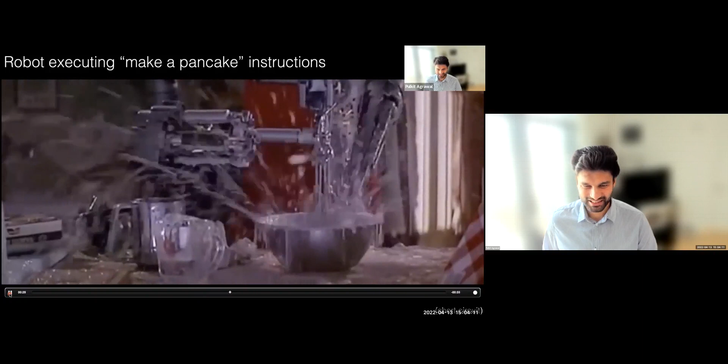Marvelous. That's what he thinks.

For crisp yet moist potatoes, brown on one side, then turn over. This will be some good slop.

Is something burning? So it never realizes, right, that it needs to take the toast out of the packet and then put it in. And when you say rotate it, it means rotate just the toast, not the pan with the toast. Right. So the point being that even if we could get to these concrete instructions, there's a lot of common sense knowledge which goes into actually executing them, right?

So one model that we typically have is: there is language, it goes to a high-level plan, and then the low-level skills which execute them. And typically what we might think is that language is the hardest part to communicate in language.

And coming up with a high-level plan is maybe hard and the low-level skills should be easy, right? But let's pause for a moment and actually look at evolution. Starting from life, it took us around 3.5 billion years to evolve apes, which maybe you can say can do some low-level skills. They can jump around, walk, use some tools.

And then from apes to humans, it took around 18 million years, orders of magnitude less time. Then for language to evolve, it maybe took 50 to 500,000 years, again orders of magnitude less time. So in some ways, evolution took a lot of time in evolving low-level skills and exponentially less time to do high-level planning and language.

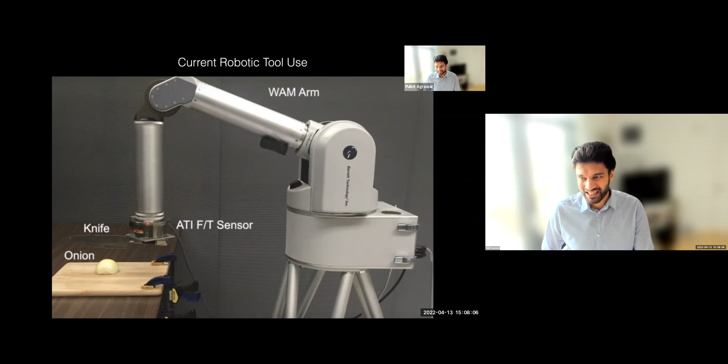So if we have to use a knife, what would we need to do? First, we need to grasp it. Then we might need to reorient it so it's in the right position to actually execute the cut. And then we can actually go and cut. Now, in grasping there's a lot of progress, and if there's a single object on a table, we can get accuracies north of 90%, even 95%.

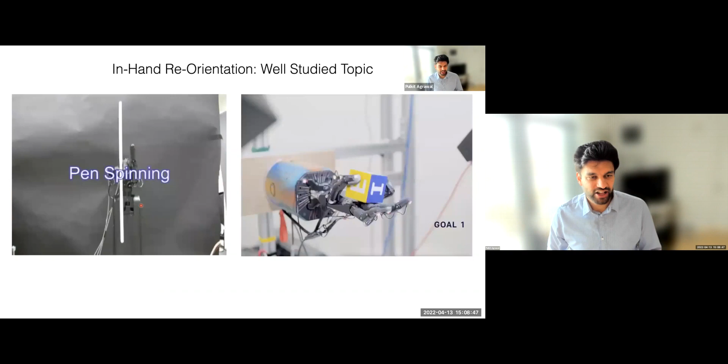But then there's this next step. If I just grasp this knife, I cannot really use it. I need to turn it around in my hand before it becomes useful, which leads us to the problem of reorientation, which is much harder. Reorienting objects has been a popular topic of research. This is a video from some labs in Japan, more than 20 years ago, manipulating this long pipe in a very dexterous and meaningful way.

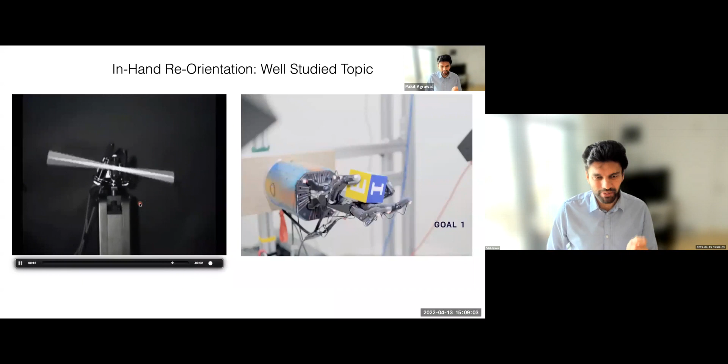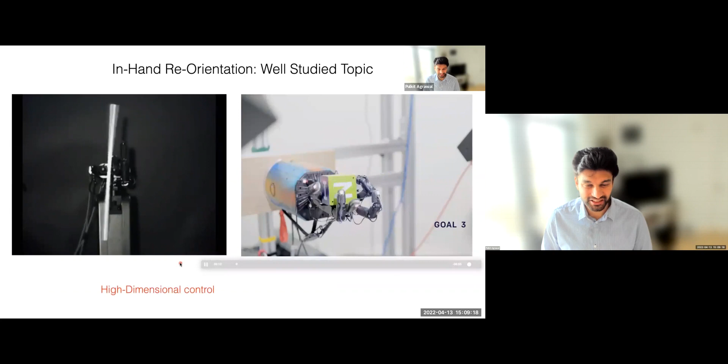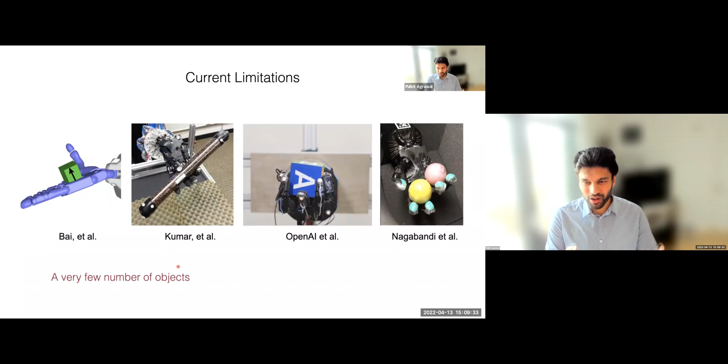More recently, there was a demonstration from OpenAI where they were reorienting this cube in the hand. But if you look at these systems more carefully, they're stymied by many limitations. The reason this problem is hard is because it is high dimensional and there are discontinuities which come from contact. But most of these systems either work with very few objects, pretty much only the objects you see on the screen, and they operate with an upward-facing hand.

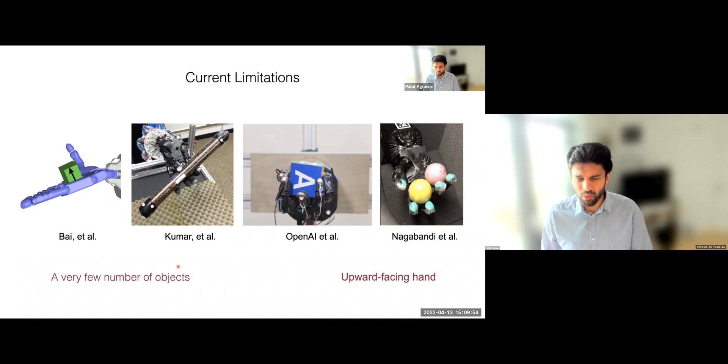And many times, to get the state of the object, there is very big sensing equipment that is put in. What I mean by that will become clear. But let's first try to solve these two issues, and let me lay them down concretely. What we want is a system which can work with many different objects, and we want it to work with the hand facing upwards or facing downwards.

I mean, many times when we go, our hand is facing downward, we go pick up an object, right? You might say, well, what's the big deal with the hand facing downward? The fact is that when the hand is facing upward, there is gravity which supports the object. But when the hand is facing downwards, the gravity is actually against us and the exploration becomes really hard, because there is no supporting force to be had. So the hand facing downwards is actually a problem where the object is almost always in an unstable configuration.

And the third constraint we want to make is that the system should actually work with real world observations. Now, what do I mean by real world observations? They are things that we can actually measure with sensors that we can put on a practical system. For example, I can tell what the target orientation is, what the joint positions of the fingers are, which we can read off motor encoders, and maybe we only have access to vision, say RGBD or a point cloud, or maybe access to an object pose system. So these things we can maybe measure in the real world with minimal instrumentation.

And what I'm going to show is how do we satisfy all these three criteria and build a system which can reorient many objects, first in simulation, and then we will move to some real world experiments. So the first question we're going to ask is, how do we reorient many objects with real world observations? This was work led by Tao and Jie, who are two PhD students.

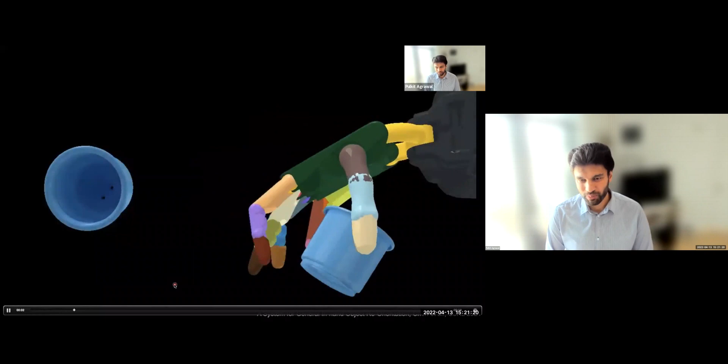So what we did was, we initiated this curriculum over the gravity, where we start with zero gravity and go to normal gravity. But this is something we can do because we're in simulator, so we can really exploit the simulator. If we do this, we get a big jump in performance. It goes from 45 to around 70% that we were seeing with the hand facing upwards. So by exploiting the simulator, we were able to build a policy which can reorient pretty much any object you give it. Not 100%, but still at 70% if you want to be within 5 degrees.

So this is just one video of the hand continuously reorienting these objects. And there are more videos of the hand reorienting different objects. And surprisingly, the observation that we had made initially, that we require no object shape, actually holds true even now. So what I'm going to do now is take a small pause and see if there are any questions.

I have a few questions, if that's all right. Yes. So I have 2 questions. The first one, do you assume any friction with the objects while using the hand? Yes, there is friction. But you still assume that you have to hold it, it wouldn't slip away from you just by not doing anything if you hold it upside down? Well, if the fingers don't apply the right force, it will slip down.

Okay. And my second question is: do you consider the maximal strength that you can put on a single object, let's say a paper cup or something? Do you consider like this is the maximum strength I can put on it, not any more than that? Not for now. One reason is we don't have tactile sensors on the hand, but that is something I'm going to touch upon later. But it's an excellent question. Thank you.

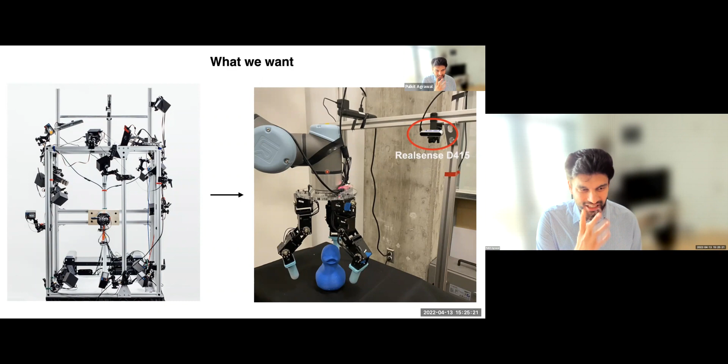The reason is this 5-finger Shadow Hand is first really expensive, but second, it keeps breaking every couple of weeks. So it's not really an experimental platform we can use for now. And this platform is much more robust. It just lasts, it doesn't break, right? So now let's see what happens in this scenario.

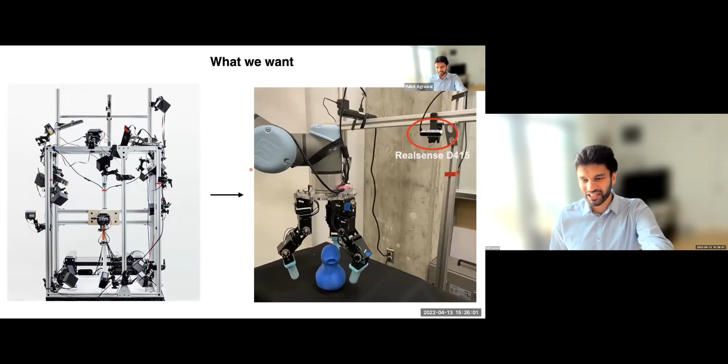So until now, what I've told you is that we have trained this policy with state, and it goes to actions. But then I also put something under the rug, which is this object current pose. How do we actually get the pose of new objects when there's severe occlusion? Because now we only have one camera looking at the object, so the point cloud is going to be pretty occluded. So how do we actually get the object current pose? This must be inferred from the point cloud data.

So now what we do is, instead of training a student policy from these states, we're going to train it directly from point clouds and also have joint positions as input. Now this needs to work in the real world, so it needs to be fast. So we have a bunch of things to make things fast, which I'm not going to talk about. And then you also need some recurrence so that you can accumulate information over time. And we were able to get speeds up to 12 hertz on the system.

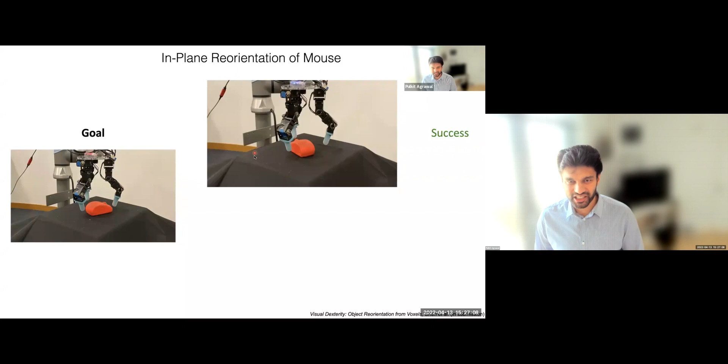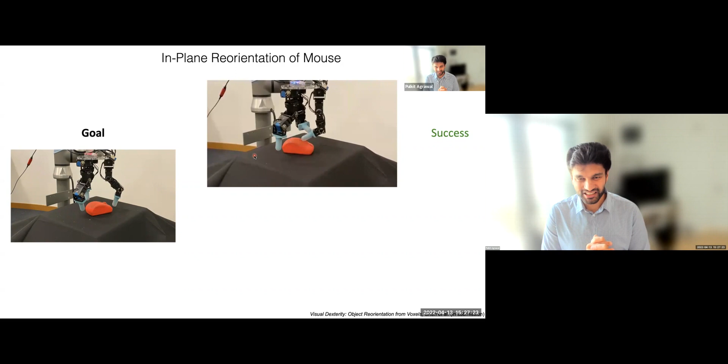And what you find is that the motions the hand is making are not elegant, but it generally makes progress in the correct direction, and when it gets close enough, it stops. Over here is another video, but this is a failure mode. But what you notice is the failure mode is not because the hand cannot reorient it. Many times it is because it does not know when to stop.

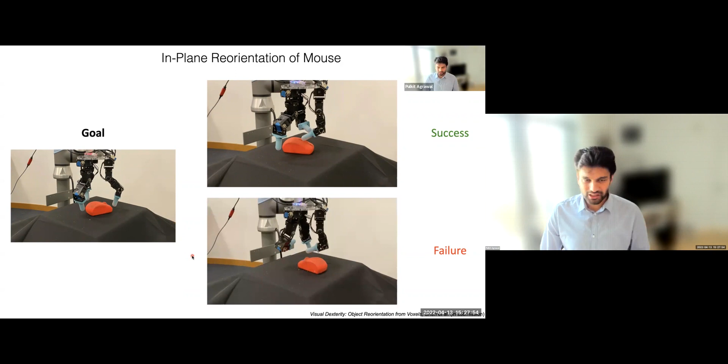And this is something that we're investigating, why it is happening. But one reason is that because of so much occlusion, it just doesn't know if it has reached the goal configuration or not. Then the system is robust to disturbances. For example, over here, Tao is putting objects at different points, and the fingers manage to pull them in and still reorient the object. So you don't need to initialize the object in any special way.

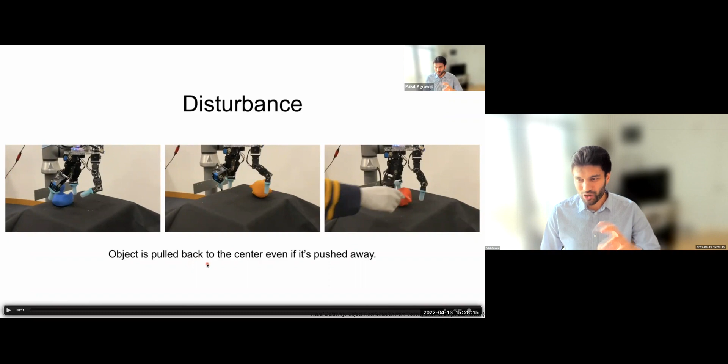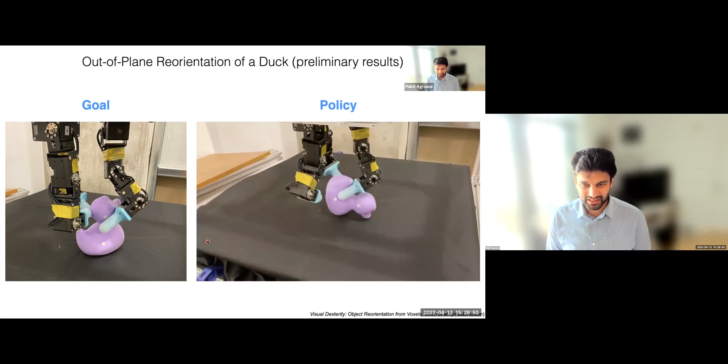Okay, so now, is this system great? I think there's a lot of room. I wouldn't say it's great. I think this is just the first sign that we can train policies in simulation and then transfer them to the real world.

And is this a video that I chose? No, this is what we commonly observe. The problem that we observe is that we don't know when to stop, or the fact that the hand is very clunky in the way it is reorienting the object.

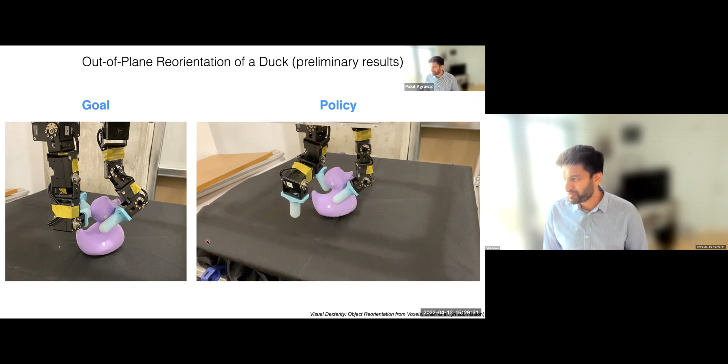So I will touch upon this, right? I mean, why is this happening? But maybe let's zoom out a little bit. So what I've shown is that first you design the controller, and then you're able to incorporate perception in the same paradigm, right? And then you might ask, why is this reorientation, which is transferring to the real world,

also very clunky? So one hypothesis is that our controllers are not as good as they need to be, but the second also comes from hardware design, where the hardware we are using is pretty arbitrary in some ways, right? First, it only has 3 fingers, which means the redundancy is much lesser. Then it has no palm.

Just imagine, pick up an object on your desk and try moving it. You will notice how many times you use the palm. This hand is rigid. It has no compliance in it. So imagine if something was made of steel and you interact with an object, you make a point contact, things just fly off. So you really want some compliance so you can conform to the shape.

There is no touch sensing, so you never know how much force is being applied. And even if you look at the finger shape, these are cylindrical, which is not ideal if you want to apply forces in a meaningful way. So there are problems at the hardware level which need to be resolved. Because of this, we have a different thread in the lab which is trying to really design hands.

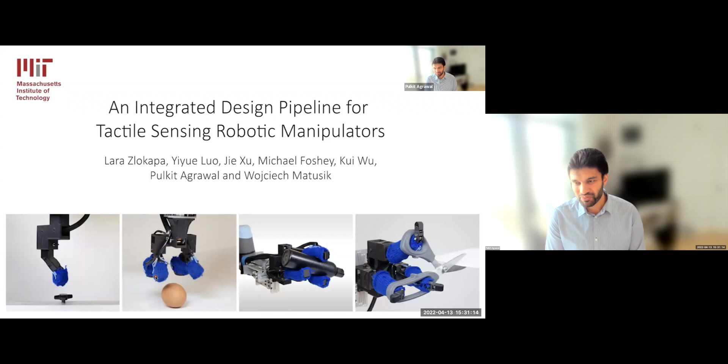So what I'm showing is a pipeline that we have developed for designing robotic hands. I'm showing you 4 different hands that we designed. These hands are 3D printed. And the blue things that you're seeing are almost like gloves that you can wear, and these are touch sensors. So how does this work?

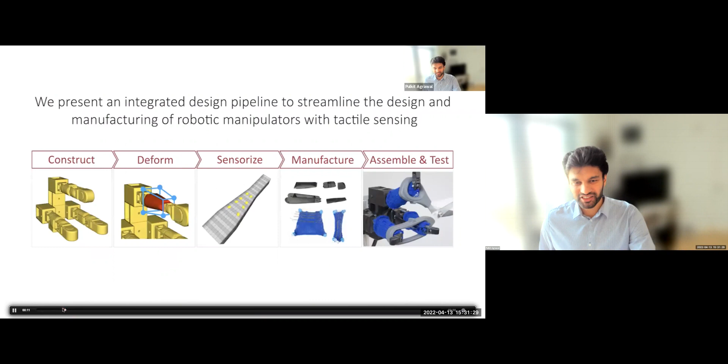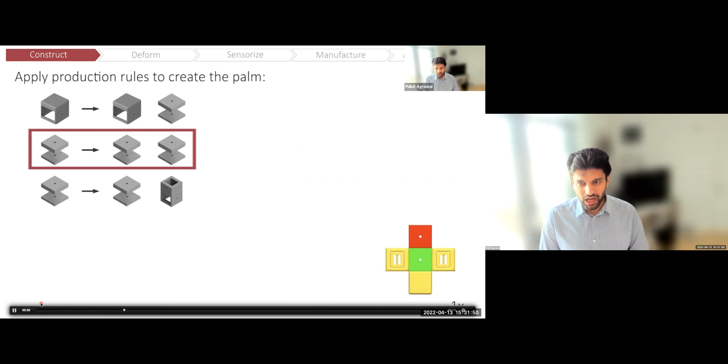Our pipeline looks like this: we construct the hand, then we deform the shape. Here's the video. Then we put some sensors, and then we manufacture it. So we have a grammar of some parts which can be composed to design different hands. This is the production of the grammar rules happening. Now I'm composing different grammar rules, and as we put them, we end up getting a hand design.

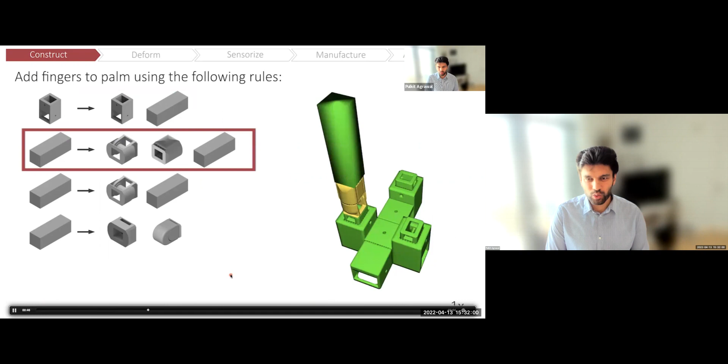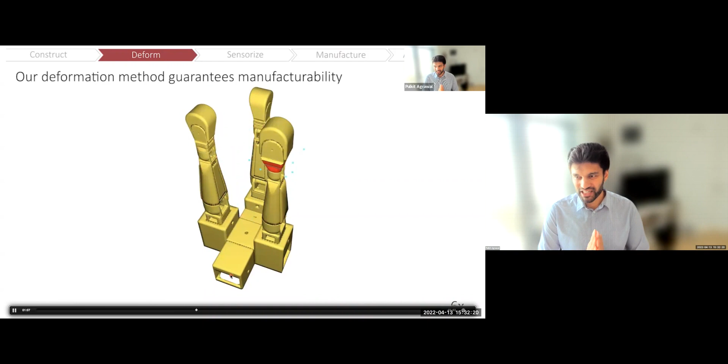What this does is it enables the designer to very quickly explore many different configurations, which is a very tedious process right now. If you have to sit in the CAD program and build everything, that's very tedious. But the shape of the hand may not be perfect, so you can go and deform the shape. And we guarantee that anything you do is manufacturable. Any design you come up with can be 3D printed and assembled together. So then we get a design.

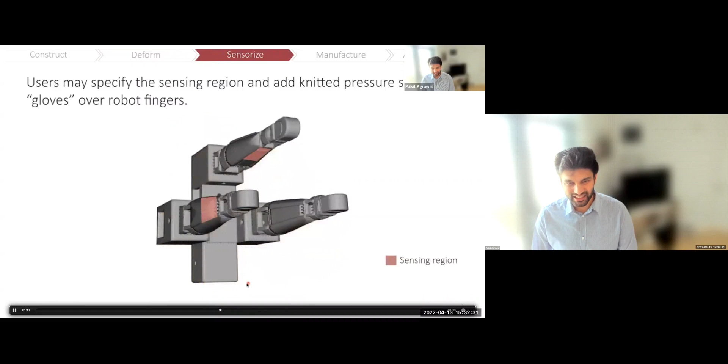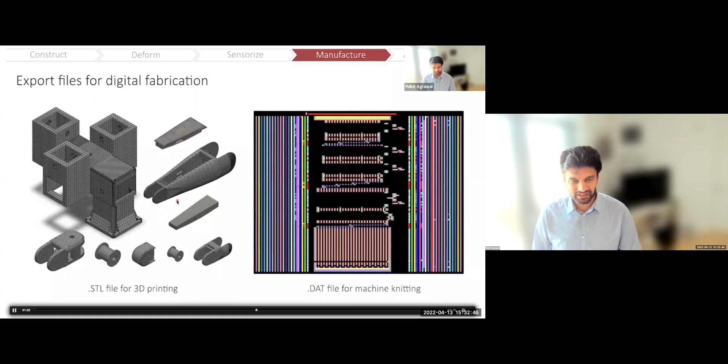Then we specify that we want touch sensors in some particular regions. We choose how the stitch of the touch sensors needs to be, and then we say where these sensors need to be located. Then the machine knitting and the 3D printing goes to printers, and these things are printed. This is a collaboration with some computational fabrication people at MIT.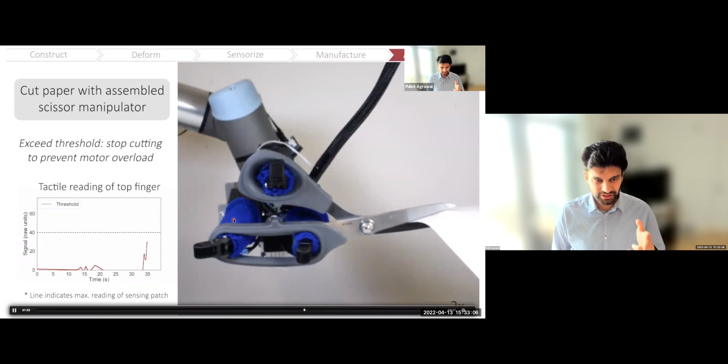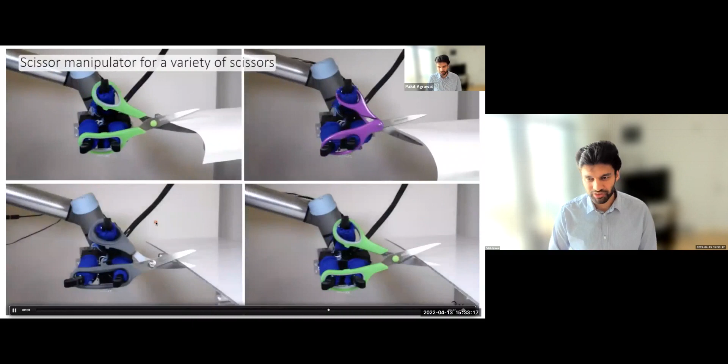Now we got this hand, and this hand tries to cut something. If the forces are small enough, it will cut it, as you see from the forces on the left. But if it is trying to cut acrylic, for example, the forces would be really big and the hand would stop. If you see in the bottom, the hand actually stops and doesn't go and cut the acrylic.

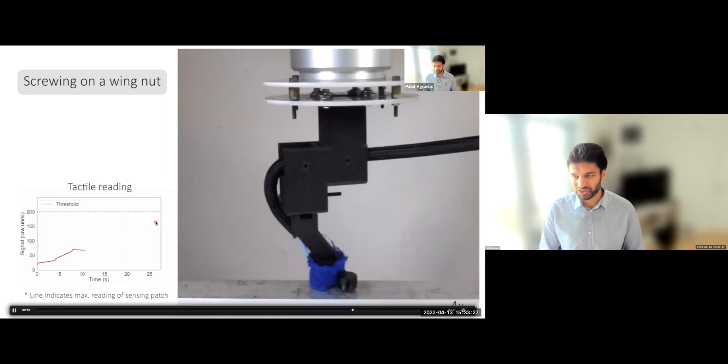So the hope is, now that we can design hands and this pipeline is completely computational, we can co-design both the hand and the control. We have been working towards it to some extent. For example, here I'm showing you some designs of hands made for the task you're doing. Over here, we needed a small thing to rotate the cube. Over here, you need a different configuration, or maybe a different configuration over here.

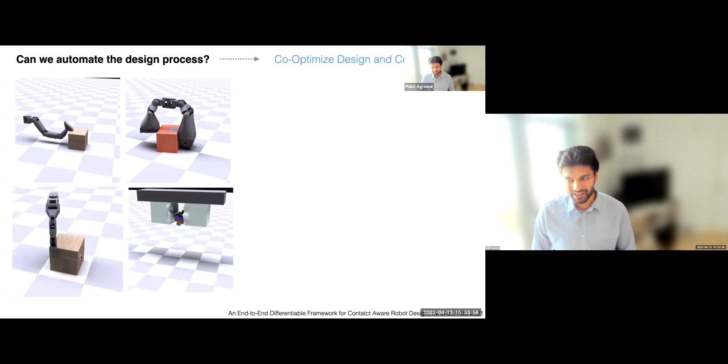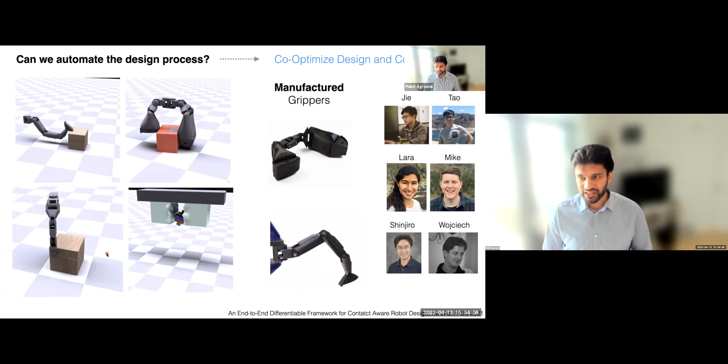And these things you can go out and manufacture. This is work done in collaboration with a couple of people at MIT. So in some ways, we can use the same framework to also do hardware and sensor design.

And I think what this problem really requires is a full stack approach where I can work on the control, the perception, and the hardware, because they all play into each other. Right? So to zoom out a little bit, we started with the fact that we want to learn low-level skills. And what I've given you is one specific skill, which is in-hand reorientation, and showed you how we can exploit the simulator in meaningful ways to make progress on this problem.

Right, so now, again, I'll take a small pause, see if there are any questions before I move ahead. Yes. I have a question. That's okay. Yes.

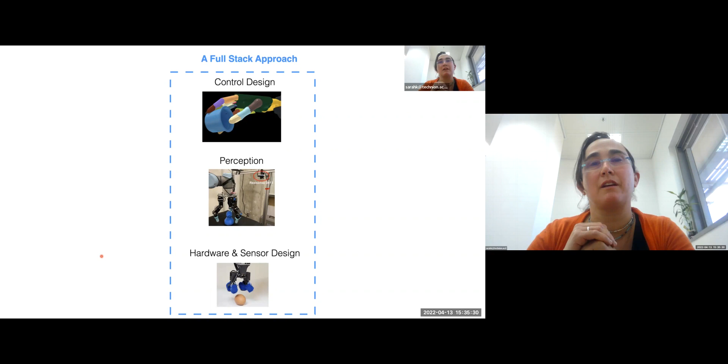So you said that in your previous slide, you had three components, one for the hardware design and one for the control design. And then you had the perception. And what I'm wondering is whether the perception and the control had direct interaction. I'm guessing the analysis of the image was focused on the manipulation task that you were aiming at here, or was it just classical image classification?

No, so the perception is trained with the same paradigm, right? So let me see if I can. I'm asking just to understand whether perception was task oriented, in the sense that it was trained to focus on things that actually affected the ability to grasp objects, or just detect objects in the environment.

No, so for example, this is the perception system, right? This is a point cloud, and the point cloud is trained to predict the actions. So the perception is trained for control. So when I say the same pipeline, I mean I'm using the same framework. Oh, I see. There is student-teacher training happening, right?

We can design controllers, we can incorporate perception, we can also do co-optimization, but we're going to use the same underlying algorithms to do all of them, instead of developing separate algorithms for control, perception, and hardware. So the perception was not a separate component. It was just part of the input, integrated. I see. Yes.

I have another question. May I? Yes. Okay, it's kind of a comment maybe about the control design. There is some evidence that when people are grasping or making manipulations, there is a sequence of actions, but in each part of the sequence, the movements of the fingers are coordinated. So all the joints are moving together in each part of the sequence.

So then they're changing from one to another, but in each part of the manipulation, the fingers and the joints are coordinated. So I'm triggered to think about whether this knowledge can be integrated somehow in the control policy, so it will be easier to learn than learning from scratch.

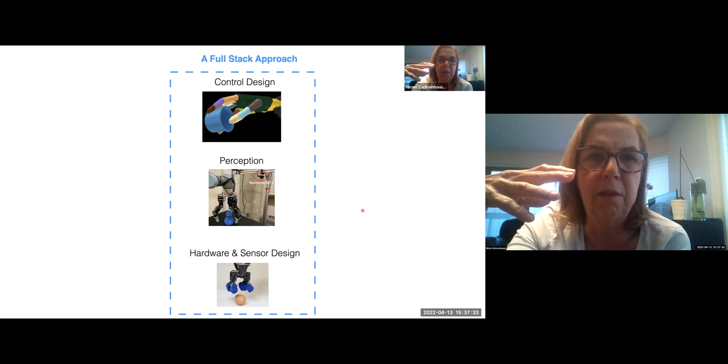Excellent question. I think there are ways to incorporate this prior knowledge. For example, you could have some demonstrations if you could collect them, and you could constrain your policy to be close to those demonstrations. But actually, I'm going to touch upon this in the context of a slightly different system, which is locomotion, where it's the same idea. So I'm going to touch upon what are the pros and the limitations of assuming it. So maybe I'll come to this question.

Okay. So I showed you one thing which was in-hand reorientation, but let me describe how we can use a similar framework to resolve some locomotion problems. And I will try to address the question which was just asked. So now we're going to take the same framework, but do locomotion. Current legged robots are great, right? We have all seen videos from Boston Dynamics, they're moving around.

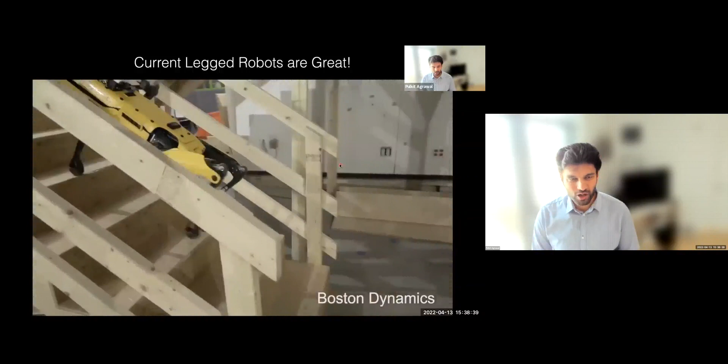So this agile locomotion has been a topic of great interest. Boston Dynamics made a robot which could be faster than Usain Bolt, but this is on a treadmill, externally powered, and the robot is held by a lever. Great demonstrations, but it cannot do it in the real world, right?

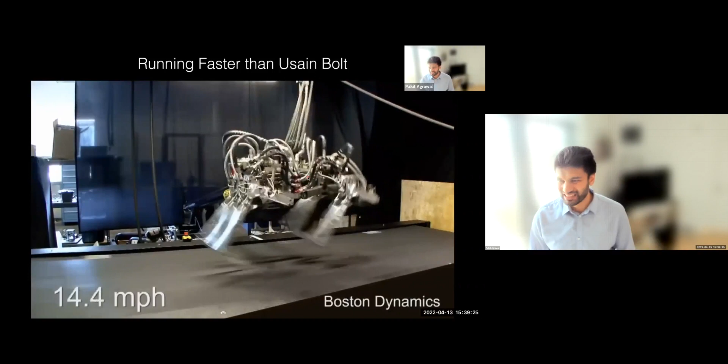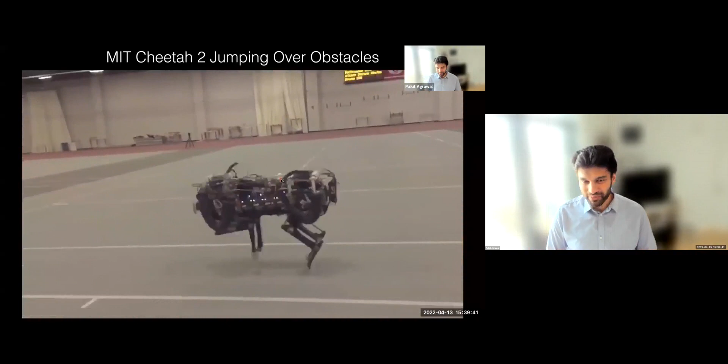Then there are demonstrations of fast systems. For example, Sang-Bae Kim's lab at MIT built this system which can jump over obstacles. But again, while the system is good, it is hand-tuned to this specific environment, and it remains unclear how well these systems would actually work in more general settings.

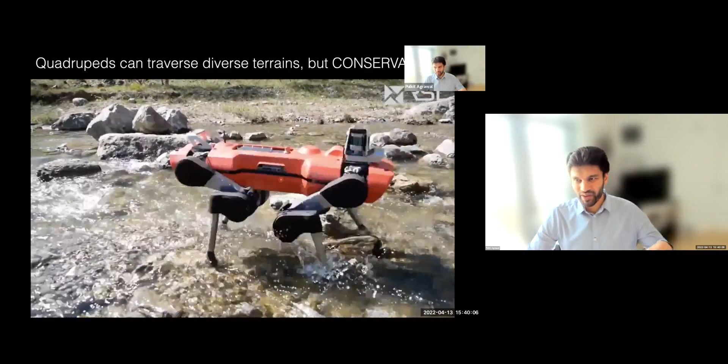But the question which we are really interested in is: what about agility in the wild? Now there is a lot of impressive work in quadrupeds traversing diverse terrains. So they can traverse a lot of diverse terrains, but the way they do it is conservatively. They make slow motions, and almost 2 or 3 feet are always in contact with the ground, which is so different than what we saw in natural locomotion.

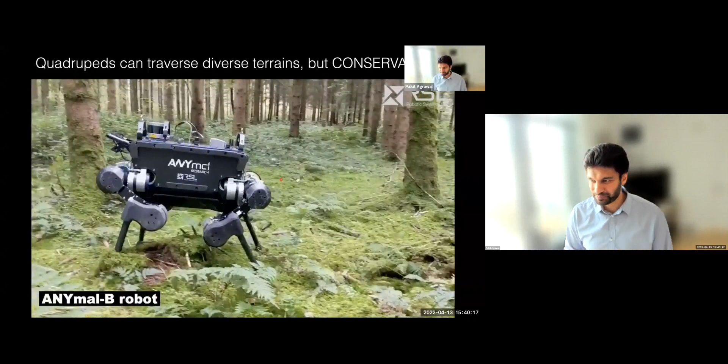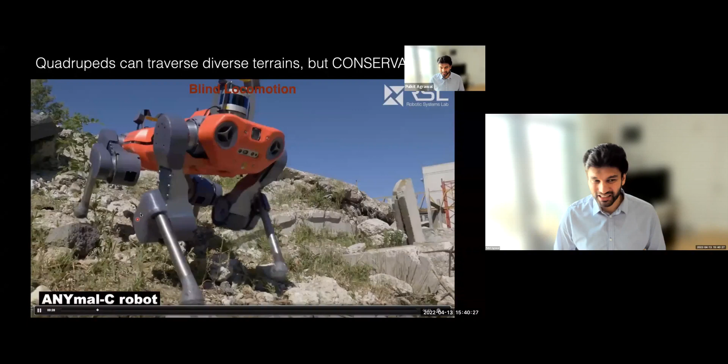And the other thing to notice is that most of these systems are actually blind. So you might say, well, they are slow because they're blind, and maybe if we incorporate perception, they'll be better. But it turns out not really. There are systems which incorporate perception. There's a lot of fantastic work from ETH in this area, but even then they are slow.

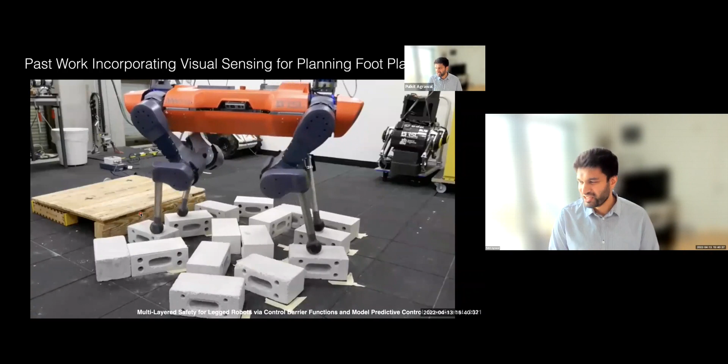So the question we asked is, why does agile locomotion in the wild remain challenging? We can get agility in simplified setups, or we can get behaviors on diverse terrains, but it is conservative. We can't get a mix of both. So, what do we do?

Some of our hypotheses going into this were: maybe maintaining stability at high speeds is challenging. Maybe there are some modeling assumptions being made. Maybe most of these systems don't have vision, and that's the problem. Or maybe it's a problem with the hardware. So we're going to address all of these problems.

But we're going to start first with whether maintaining stability at high speeds is challenging, or whether modeling assumptions are a problem. Just to start, we're going to use an existing model-based controller, which is similar to the comment that was put in: what if there were some pre-specified waves of motion, which is what most model-based controllers do.

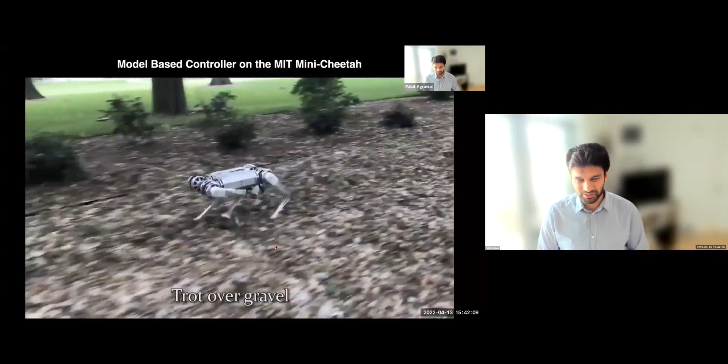So we use this Mini Cheetah as the experimental platform. We have the camera on the cheetah, and it has 4 legs. The pre-specified model-based controller can walk, and it can also walk on diverse terrains. So we said, okay, great. This is very good work. It's also a robust system. This is not from our lab. This is from Sang-Bae Kim's lab. He designed all of this.

And then we said, okay, let's see if we can anticipate the future and do some agile tasks, using terrain information for agility. This led us to this work, learning to jump from pixels, led by Gabe, who was a PhD student, and a bunch of collaborators, and also Sang-Bae. So the experimental setup first was simple: we have this robot which we want to cross gaps, and we change the difficulty of the environment by varying the gap width and density.

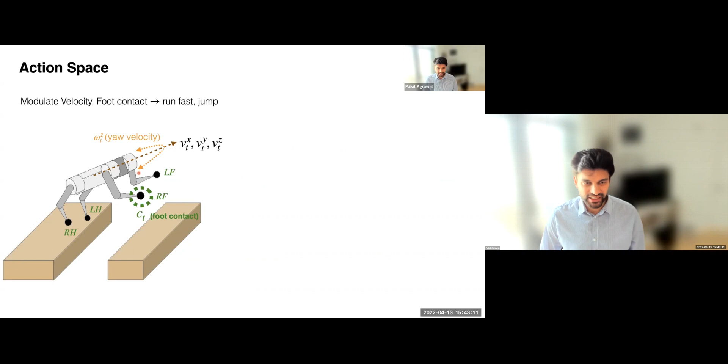Our action space is the velocity of the robot. By modulating X, Y, and Z velocity, I can make it jump, and also yaw, how much the robot can turn. Then the robot feet make contacts: the left front foot, LF, right front foot, RF, and similarly the hind feet, which dictate the contact state. So over here, the front legs are in the air, so it's 0. The hind legs are in touch, so it's 1.

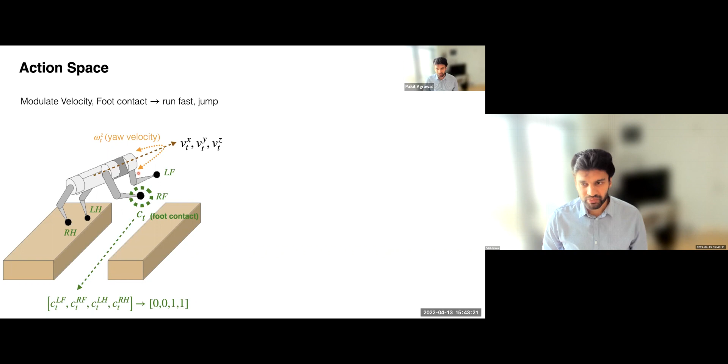Now, what we want to do is, given the camera observations, train a policy which will predict these high-level velocities and contact states of the robot. This gets fed into a model-based controller, which produces joint positions, and there's a low-level PD controller which produces motor torques. Now, this is existing work, so we took the system as is.

So you might say, well, instead of going through this intermediate representation, we can try to directly go from depth images to predict actions, have some rewards and use model-free RL. Now, the problem is that, while this is very good for deployment, it's really hard to train. We tried training this, it doesn't work. One reason is that as the robot is moving, the camera is also moving, which creates images which move in different ways. And the amount of noise we were getting, we couldn't handle it.

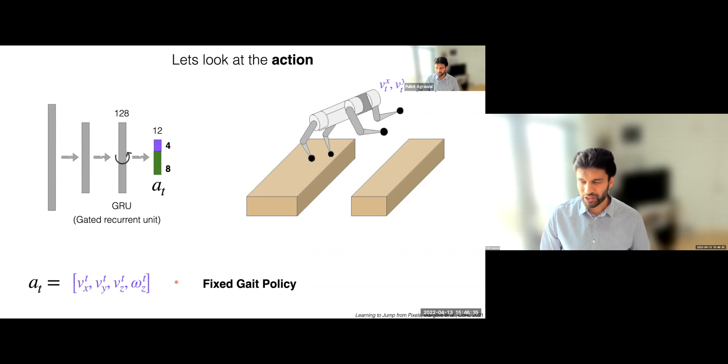So let's look at the first component in purple first, which is the 4 velocities of the agent. Now this is what is called a fixed gait policy, which is a common assumption in prior work. Now, what do I mean by gait? By gait, I mean we have some knowledge of how different feet should move, and they are synchronized. So this is one example of a gait which is running trot. Here is another example of a gait which is bounding. As you see, the legs are moving in a synchronized way.

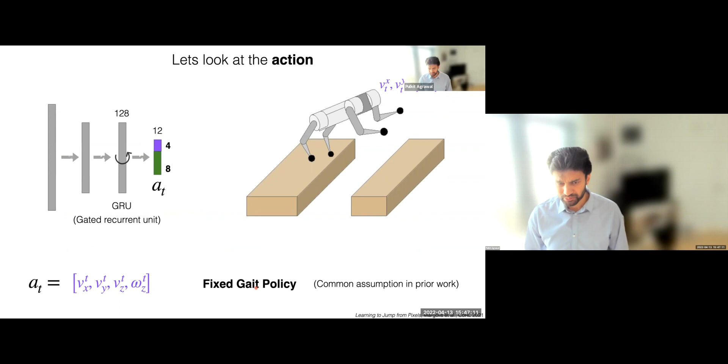So first, what we're going to do is just change the velocity of the robot, but let the gait be fixed. That is, the relationship between the legs' motion is fixed. We're just changing how fast the system is moving. And the reward we're going to use is how much forward progress the system makes. The action should be smooth, and maybe don't run too fast. At training time, we're going to sample different configurations of the environment. So these are some different episodes, and then see what happens.

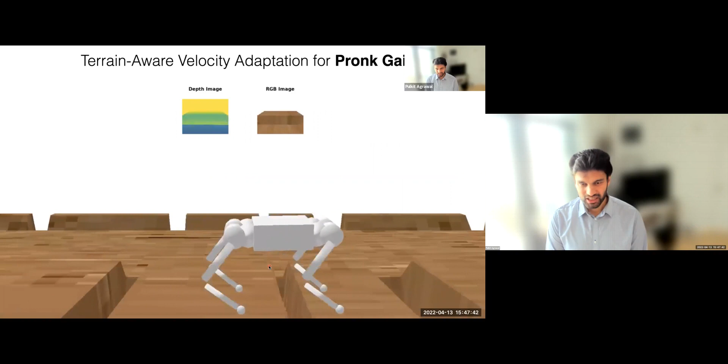But if we were to put this in context, the robot's body length is actually 40 centimeters, but we're only able to cross gaps which are less than 40 centimeters. It's nowhere close to the kind of agility I promised before. So what's going on? What's going on is that we have really limited the robot's motion and how it moves its legs by keeping the gait fixed.

So now we're going to also let the gait change by deciding when the robot's feet are going to be in contact, right? So we are also going to predict which feet should be in contact, which is what leads us to this variable gait policy. Now, when we deploy it in simulation, you can see it feels much more agile.

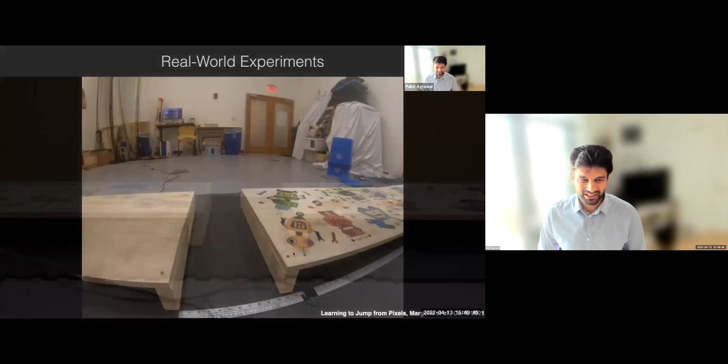It can cross longer gaps, right? So by freeing this assumption and letting the system decide how to move its legs, we can actually have this blue line, which can cross much longer gaps, much more than the robot's body length. Now we can take the system and try deploying it in our lab environment first. Here is one example, here is another example, the system trying to cross those gaps, right?

So, in some ways, this was our first attempt in trying to use the same framework, the student-teacher framework, to try to do perception for these quadrupeds. But if you notice the videos I showed you, you might have said, well, wait a minute, there was a difference. The real-world gaps look much smaller than what I showed you in simulation. And this is actually true, right?

Like in simulation, we could maybe cross a 54 or 60 centimeter gap. But the best real-world performance we could get was only 26 centimeters. We couldn't cross gaps beyond it, right? We were like, why is this happening? So we ran a series of tests and investigations.

What we found is that this model-based controller relies on body velocity. And to estimate the body velocity, there's an assumption which is made that there is no slip between the foot and the platform. But at high speeds, it doesn't hold true. The robot is slipping all the time, right? And therefore this MPC just breaks down.

It is possible to fix it. But then other things might come up, right? At very fast speeds, the motors might behave differently. They might not be in the linear regime. There are other things which keep coming up. So it's a long tail of problems.

Now, I think it is possible to fix all of these problems, but it takes months to fix each one of them. So what we wanted is something which is more scalable instead of, as a human designer, finding each problem and debugging them. So what we decided was to let learning figure it out. So we replaced our model-based controller with a model-free controller, not because model-based controllers cannot do something, it's just because they are not as scalable as what we think model-free control could be, right?

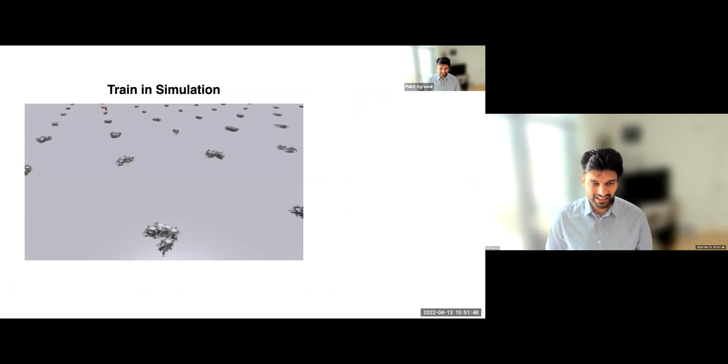So now we're going to design the controller in a similar way, which is going to train in simulation and then transfer these policies trained in simulation to the real world. So a nominal policy trained in simulation looks like: we have some states, we predict some actions, we maximize the sum of rewards. Now, typically in simulation, we have to assume some simulation parameters, for example, some friction, some robot mass, so on and so forth, which I'm going to call nominal simulation parameters. The outcome is a policy called a nominal policy.

Now let's look at how the top speed of this policy looks as I'm varying the friction. Why am I varying the friction? Because I don't really know the real-world friction. So I really care about the performance of the policy across a range of frictions. So what you find is that at the nominal friction, the policy does quite well. As the friction increases or is different, the performance drops, right?

The performance drop on the left also happens, but there's another reason why it happens, because at low frictions, you really can't run that fast, right? So we would focus mostly on the right part of this curve.

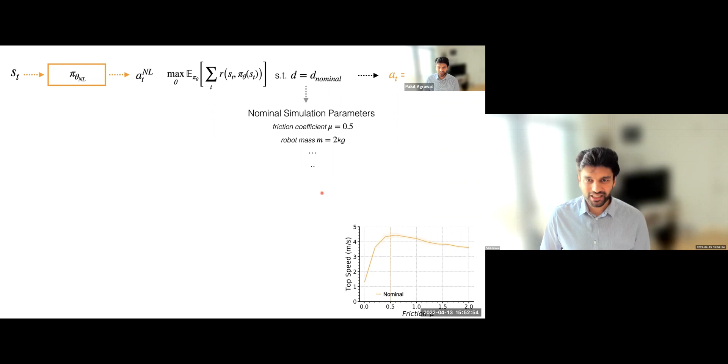Then the typical approach to deal with this problem is domain randomization, where we try to train this policy, but we try to take an expectation over different values of domain parameters. For example, we can sample ground friction from some range, mass from some range, because we don't know exactly what it is in the real world, and then train a policy which is robust to different parameters, which is called domain randomization, or DR.

So now let's plot the DR policy. What you find is that it is transferring better at frictions which are different than the simulation, but at the nominal friction, the performance is worse. So the transfer is better, but it is more conservative. The reason this is happening is because we are trying to average over domain parameters. We are not aware of what the domain looks like. So, what if we fed the domain parameters as input to the policy, right?

Which is, you have the state, but also what is the friction, what is the mass as input, and then we predict the action. And this information is, again, privileged simulation information, available in simulation, not in the real world, right? So we can now train this policy, which is what we're going to call the teacher policy. And as the story has been, this teacher policy does very well, but it's something we really cannot deploy. So we want to find something which we can deploy, right?

So then we have a student policy, which we are going to deploy. And the idea is we're going to infer what these simulation parameters are going to be from a history of state action observations, right? And the way this is trained is the same. We do behavior cloning of the student, and we get the student policy. Now, if we compare performance, what we find is the student policy closely matches the teacher. It does well at the nominal value, but also works well as the parameters are different.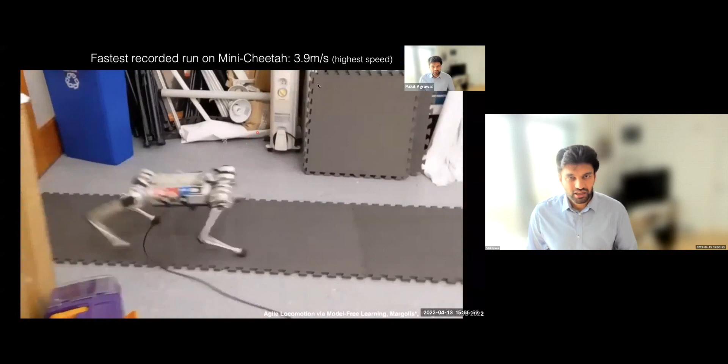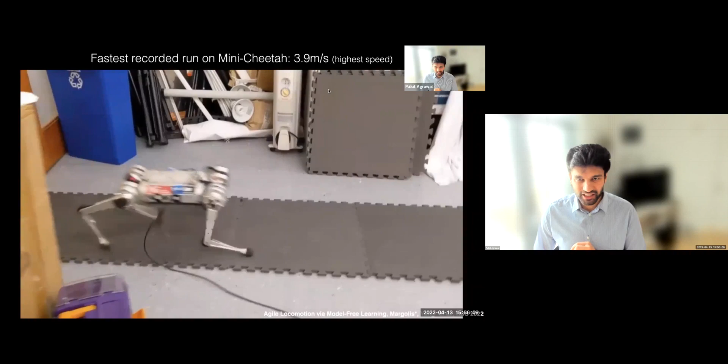Right? So what I'm going to do is jump to some results of the system, right? So let's see what the system ends up doing. Right. So first, this is running the system in the lab. We recorded speeds of 3.9 meters per second, which are the highest speeds recorded on this system in any setting.

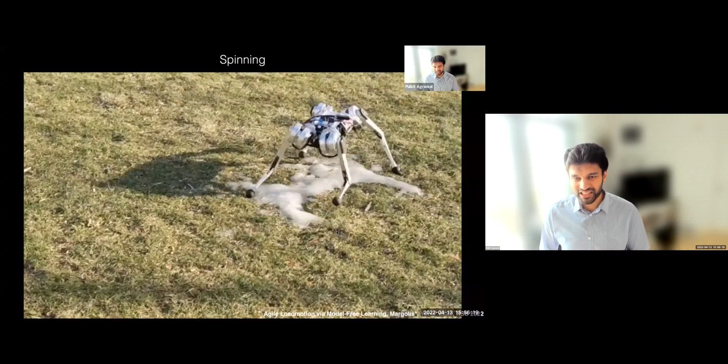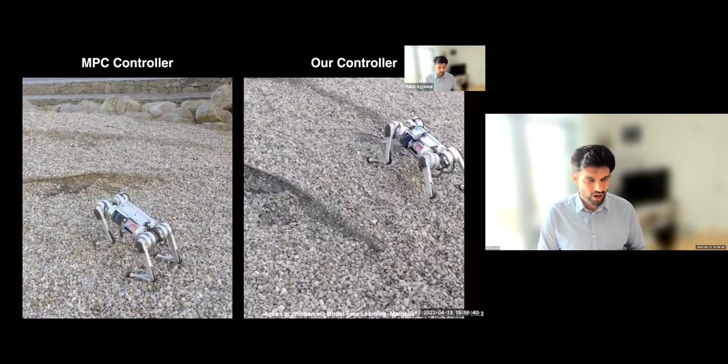We can also take it on more challenging domains, right? For example, here, it can not only run fast but also spin. This is on ice, which is very slippery. And we can take it on other terrains, right? So I'm showing on the left the MPC controller. At some point it is trying to climb the gravel, and it kind of stops. Again, the message is not that one cannot build a better MPC controller. What we feel is you need to tune the MPC controller per environment.

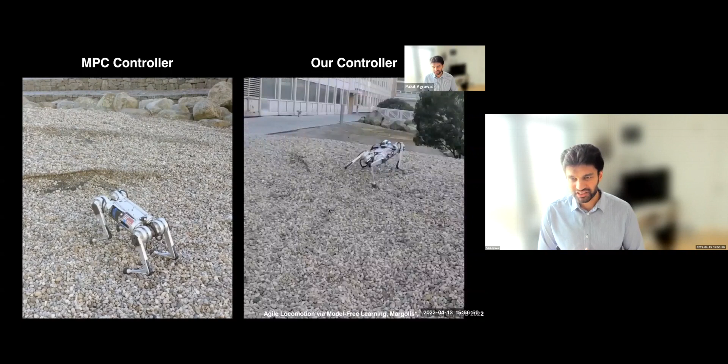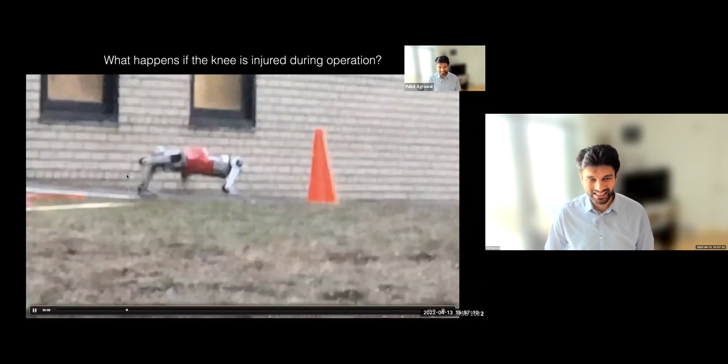So this is what our system ends up doing, right? And it can both run and spin, right? There are more videos, but sometimes unexpected things can also happen, right? Over here, this robot is running, but a screw from one of its motors came out. So if you see the leg, it's actually limping, right? But it still keeps on walking. It doesn't really fall down. And so in some ways, we can use the same framework and again go back and improve the controller. So now a controller can work in the real world, is agile, doesn't have vision in it, right?

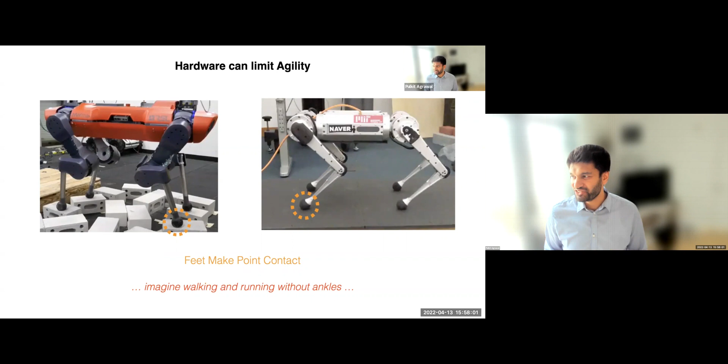So what we're looking at is, now that we fixed the MPC problem, we're going to integrate both control and perception. But the other part is also hardware, right? If you look at these quadrupeds, all of them have these ball joints which make contact with the ground. Why are they balls? Because the balls make point contact with the ground, which is easy to model, right? But just imagine if you didn't have ankles, how hard it would be to walk and run. It's much harder, right? It wouldn't be as agile. So what we're investigating is how we can co-design these ankles for the system. This is work in collaboration with some mechanical engineers and students.

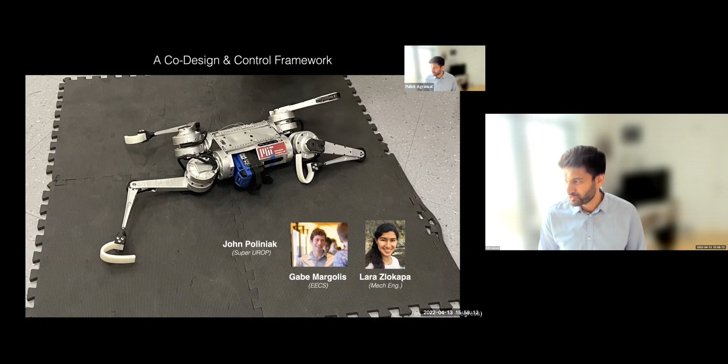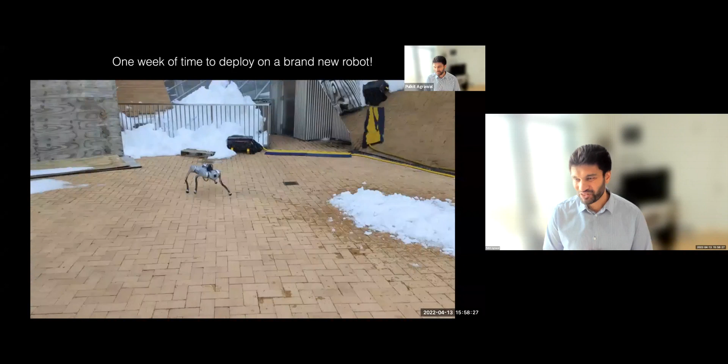And then you can say, well, what happens if we get a new robot, right? Turns out we got one of them, and within 1 week, we can replicate everything that I showed you, right? So in some ways, the system is really scalable.

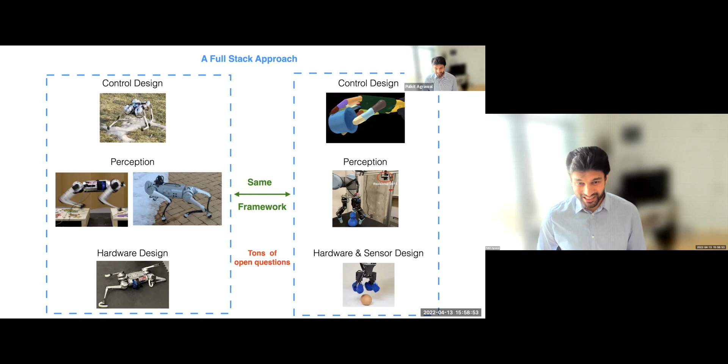So to summarize, what I presented you is a framework in which we looked at 2 different problems using student-teacher learning. We work with the same simulator, same paradigm. And one thing which is important is this idea of curriculum learning. So even to get this agility, we did require curriculum, which I didn't have time to look into. There are tons of open questions, right? And I'm happy to discuss them after the talk.

So to summarize, what I showed you is how to learn low-level skills for 2 different problems, how to do it in a full stack way and in a way which is scalable, and which we feel is going to be a big part of the dream to have robots do things that we ask them to do. So with that, I'm going to stop.

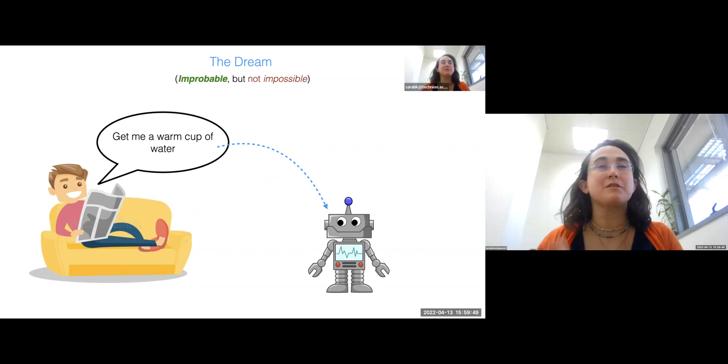I have another one, if that's okay. Yes, yes, please. So can you go back to the slide where you were showing us the controller versus the model-free approach? It's pretty cool. I kind of recognize all the locations where you filmed these videos, so I'm very excited.

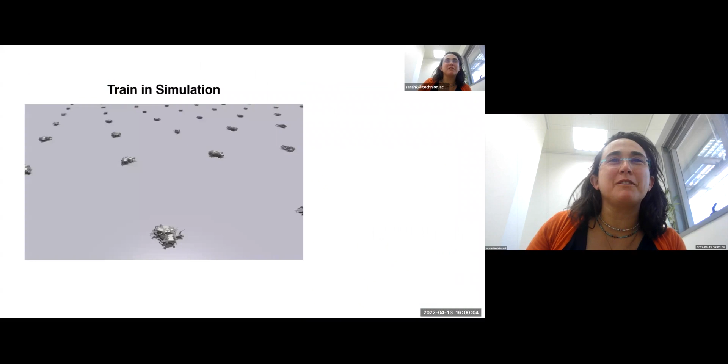Anyway, you said that the model-based controllers failed, and that's why you actually switched to using a model-free approach. Couldn't you actually use the models as a base or as a prior to the training process, instead of just setting them aside, starting to learn from them and just tuning them and learning how they operate?

Yes, so that's an excellent point. We have looked at that problem in a different context, for controlling some micro robots, right? We start with a model and just learn the residual. But it really depends, right? It depends on what is more complex.

So suppose your model was linear and you were trying to learn a non-linear function, then most of the complexity is going to be in the residual. So at that point, the benefit you get from the model is very small. But if the model is complex and the residual is linear, maybe then that approach works, right? So I think it is problem dependent.

And the second thing which happened for us is we were not really training in the real world. We were training everything in simulation. So in some ways, those differences are not a major thing for us right now, right? If it trains in 3 hours versus 2.5 hours. Then the quality of the data that you use really depends on the quality of the simulator, right? The model is still there, but it's there in the simulator.

Yes, so the model is still there, right? We cannot escape models. The models are in building the simulators, right? So the point is not saying don't have models. The point is have models, but let's use them in a different way. Thanks.